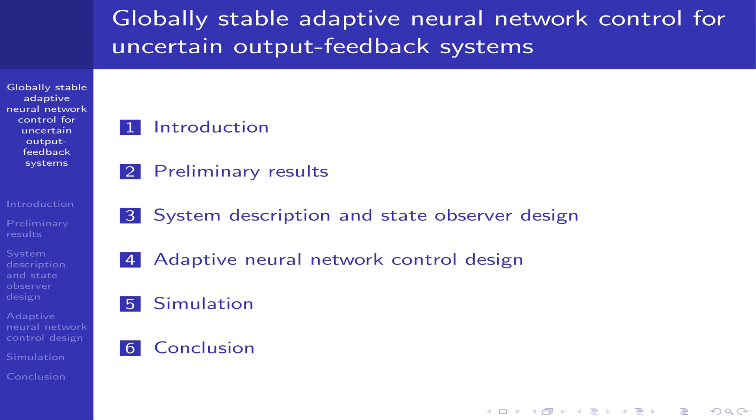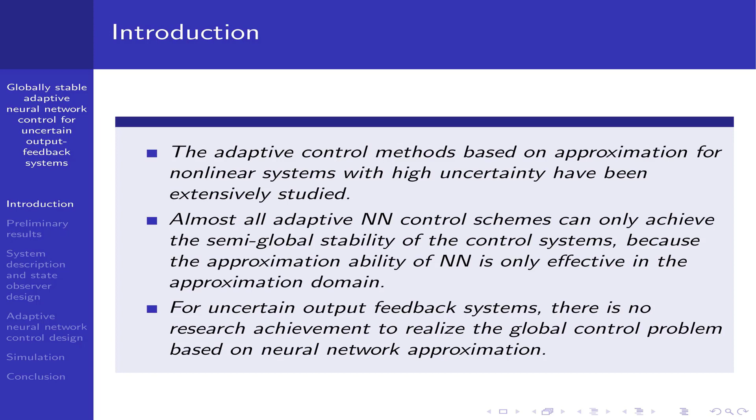Firstly, the introduction. The adaptive control methods based on approximation for nonlinear systems with high uncertainty have been extensively studied. Almost all adaptive neural network control schemes can only achieve semi-global stability of the control systems, because the approximation ability of the neural network is only effective in the approximation domain. For uncertain output feedback systems, there is no research achievement to realize the global control problem based on neural network approximation.

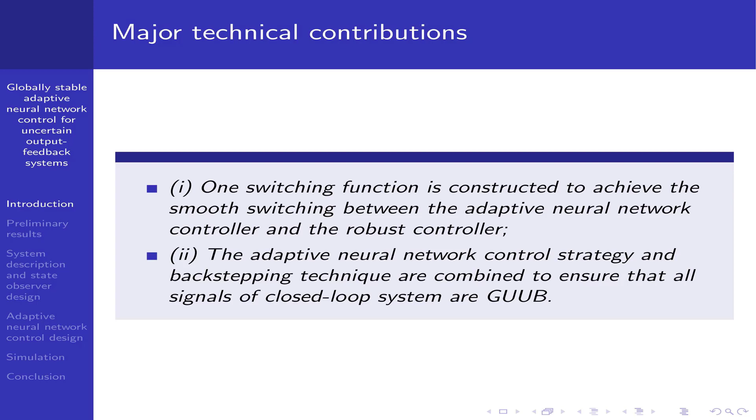The major technical contributions: first, a switching function is constructed to achieve smooth switching between the adaptive neural network controller and the robust controller. Second, the adaptive neural network control and backstepping technique are combined to ensure that all signals of the closed-loop system are globally uniformly ultimately bounded.

In the preliminary results, we designed a switching function m(y) with the following form, where R1 and R2 are the switching lower bound and switching upper bound of y, which satisfies this condition.

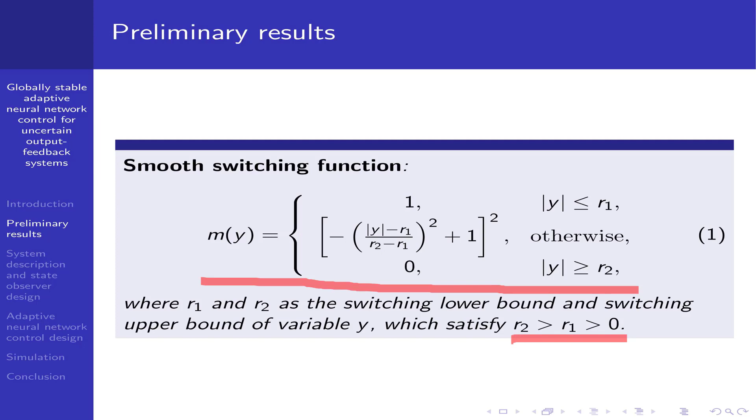Then we give the system description. Consider the following second-order output feedback nonlinear system, where x, y, u are the system state vector, output signal, and control input respectively. B0 is a known constant gain. Fi(y) are unknown smooth functions.

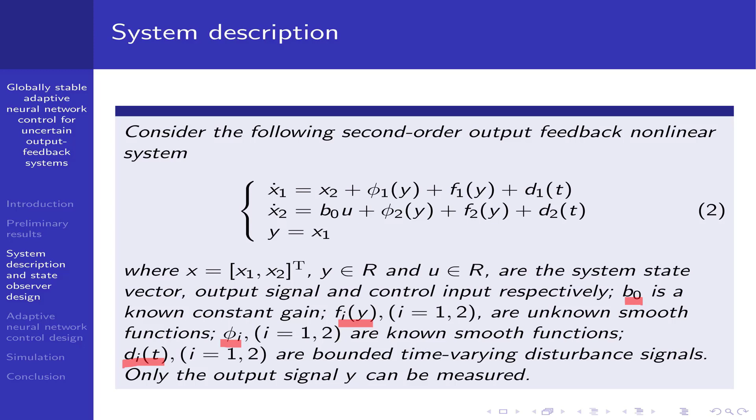Phi_i are known smooth functions. Di are bounded time-varying disturbance signals. Only the output signal y can be measured. Our control objective is to design a controller u such that the closed-loop system is globally uniformly ultimately bounded.

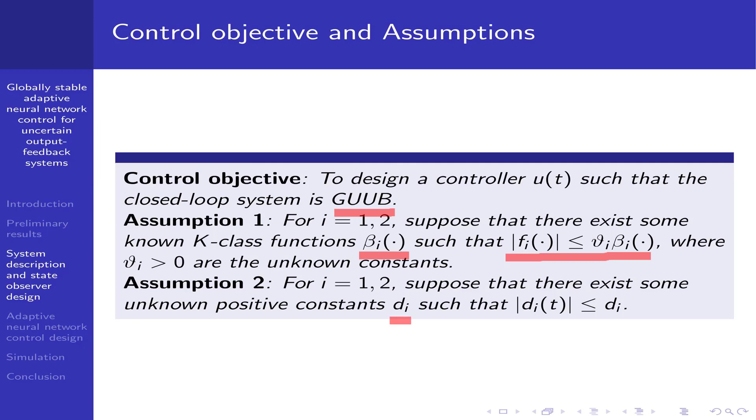To achieve this objective, we give the following two assumptions. Assumption 1: suppose that there exists some known K-class function beta such that this holds. Assumption 2: suppose that there exists some unknown positive constant Di such that this holds. Using radial basis function neural networks to approximate the unknown function Fi.

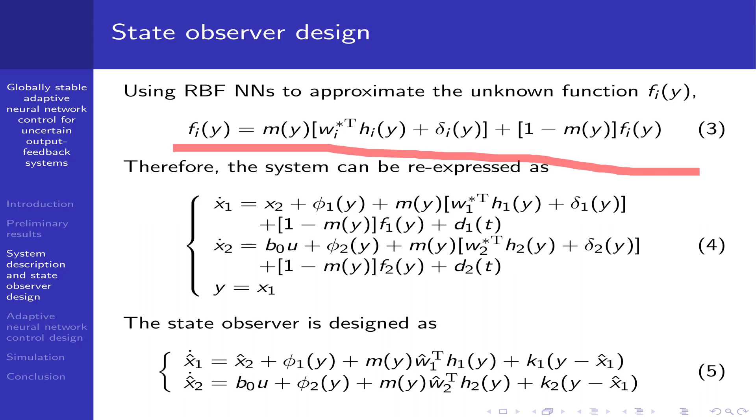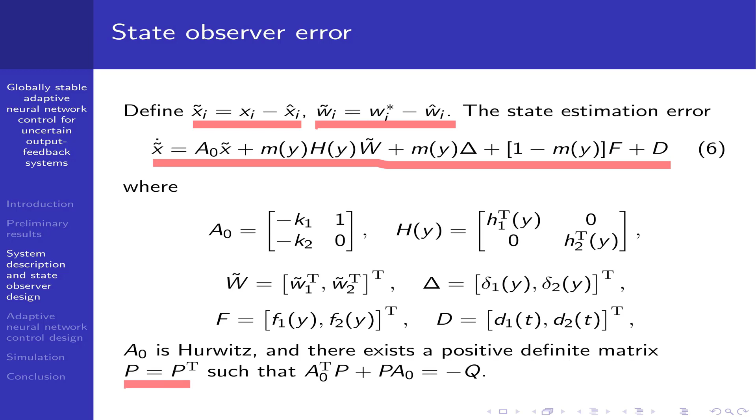The next part is adaptive neural network control design. Firstly, design the coordinate transformation as this: Z1 is equal to y minus yr, and Z2 is equal to hat x2 minus alpha 1, where alpha 1 is the stabilizing function to be designed.

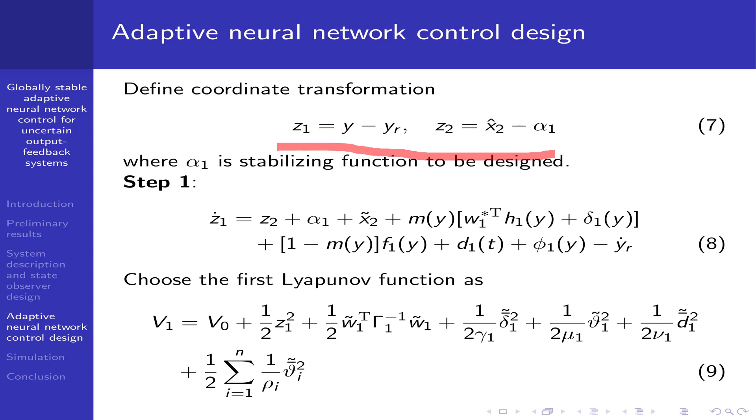Step 1: the dynamics of tracking error Z1 is as follows. Then we choose the first Lyapunov function as this. According to the above Lyapunov function, we can design the virtual control alpha 1 as this.

Where alpha 1n is the adaptive neural network controller working in the approximation domain, and alpha 1r is the extra robust controller working outside the approximation domain.

The first set of tuning functions are chosen as this, and the adaptive law of this parameter is chosen as this.

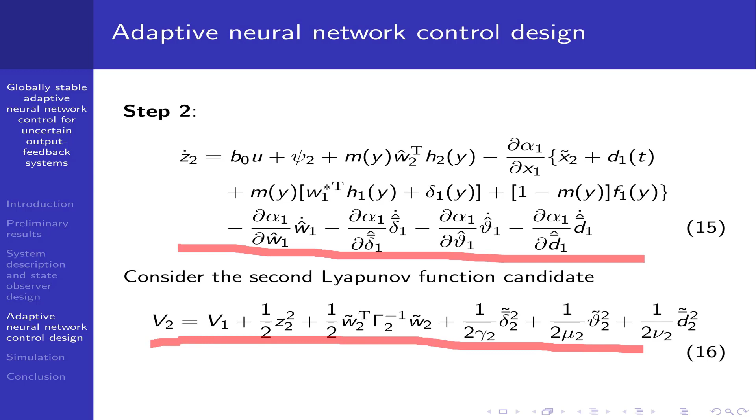Step 2: the dynamics of the second coordinate transformation Z2 is this. Then we consider the second Lyapunov function candidate V2 as this. From the second Lyapunov function, we can design the controller U as this.

Where alpha 2n and alpha 12n are the adaptive neural network controllers working in the approximation domain, and alpha 2r and alpha 12r are the robust controllers working outside the approximation domain.

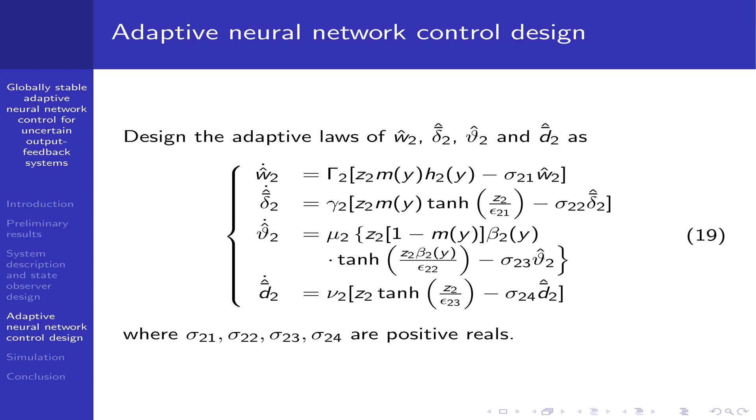Design the adaptive laws of the second set of parameters as this. According to the second set of tuning functions, we can give the adaptive laws of the first set of parameters as this.

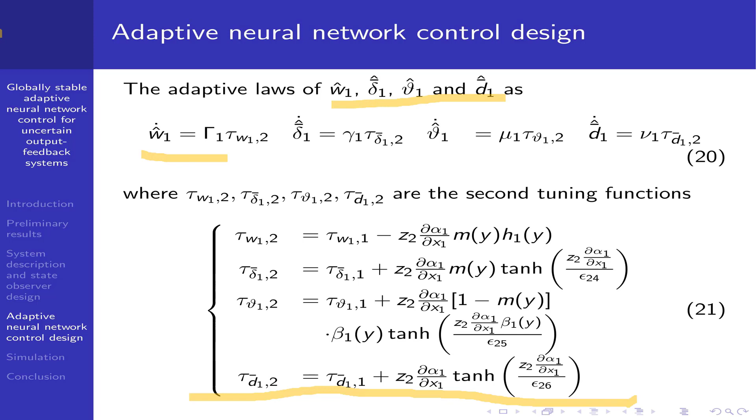Last, we can give the main result. For the uncertain output feedback nonlinear system, we design the state observer, the control law, and the adaptive laws. If the following design parameters are chosen such that the following three conditions hold, then all the signals are globally bounded for all time, and the output tracking error converges to a small neighborhood.

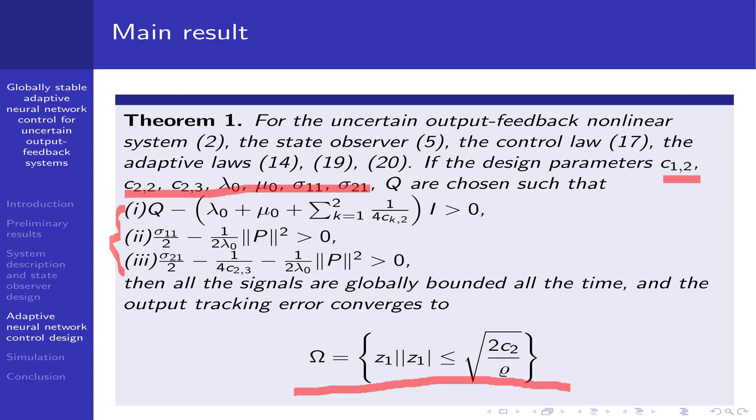In order to verify the effectiveness of the proposed control method, we give one simulation example. Consider the following second-order differential equation, where b0 is equal to 10.

f1 and f2 are the functions assumed to be unknown. Phi1 and Phi2 are the known functions. D1 and D2 are the bounded time-varying disturbance signals, and the reference output is taken as this. The known functions are selected as this.

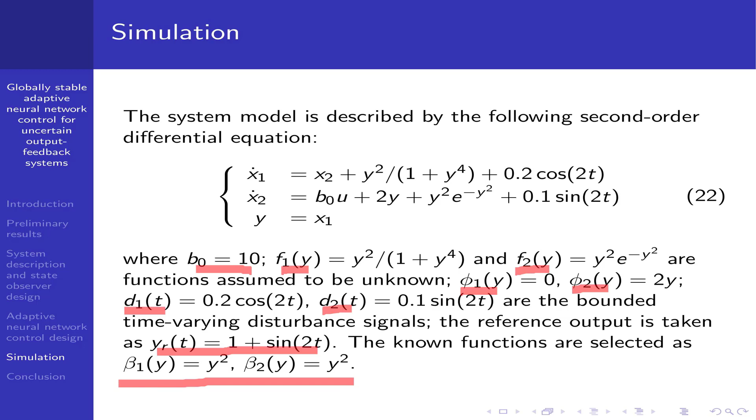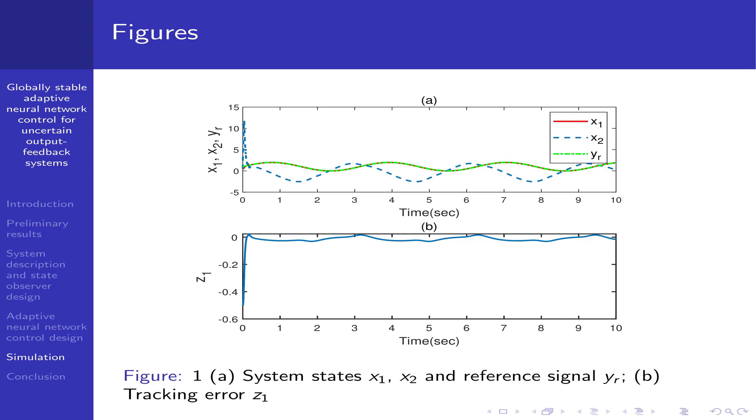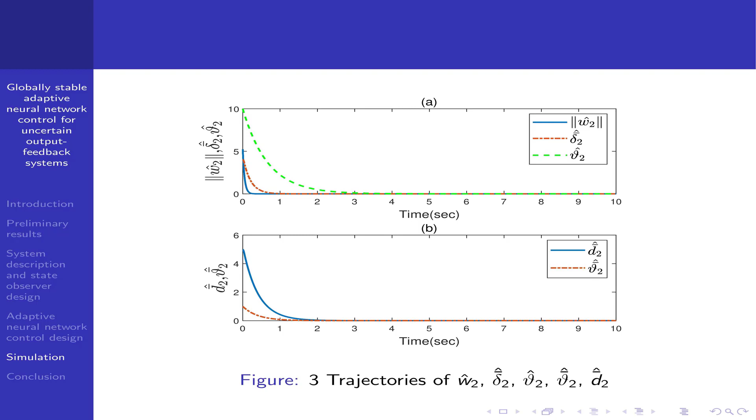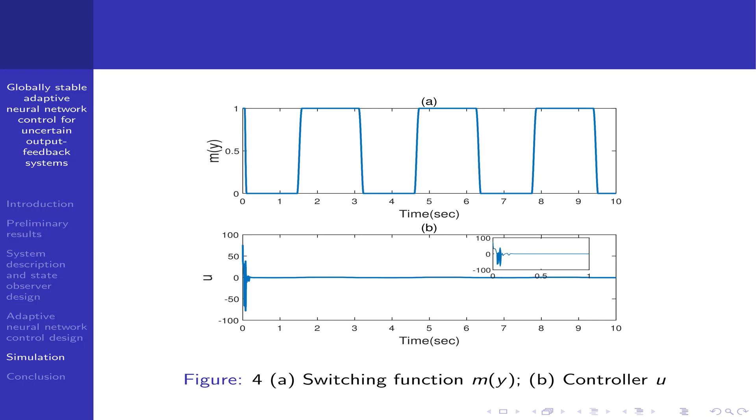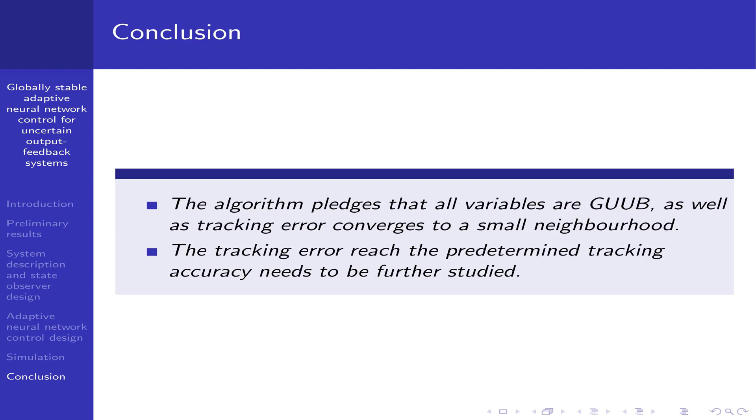The last part is conclusion. The algorithm pledges that all variables are globally uniformly ultimately bounded, and the tracking error converges to a small neighborhood. Having the tracking error reach the predetermined tracking accuracy needs to be further studied; this is the next research direction. Thank you for your attention.